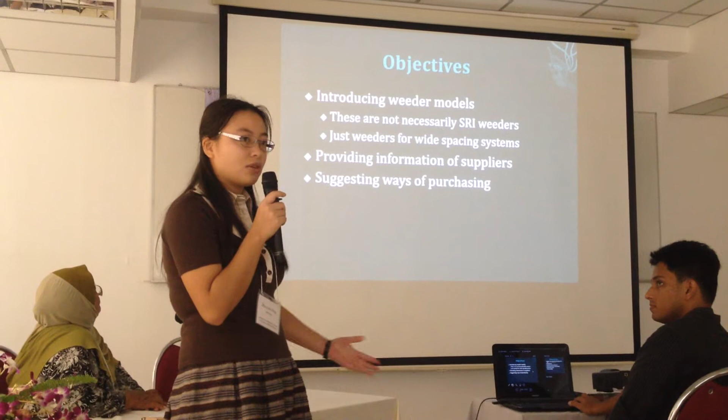The objective is to introduce different types of weeders and see if they are available for other parts of the world to get. I also have information on all these companies and websites where you can look for these weeders.

First is China. I found some research articles and patents about different kinds of weeders, but unfortunately I was not able to find them online. It seems they are only manufactured in small factories, only available to local people. But I still figured out how to find 2 big companies manufacturing and possibly selling them.

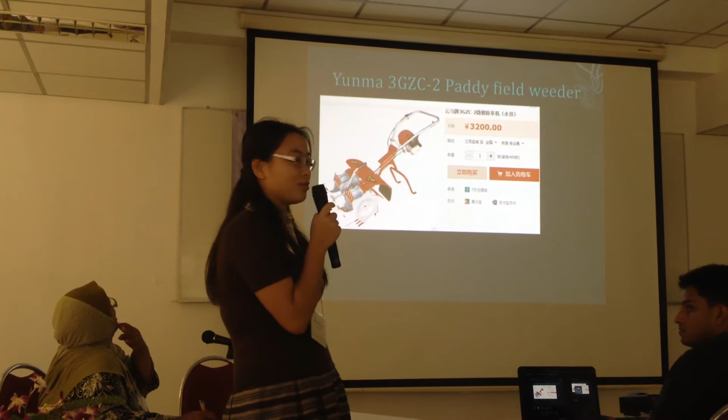The first is this one - a kind of big company that does a lot of international trading, and they make a motorized 2-row weeder. This is how it looks, and it looks pretty similar to what we saw yesterday. This is the price on the Chinese online shop, and it will be about $540 I think.

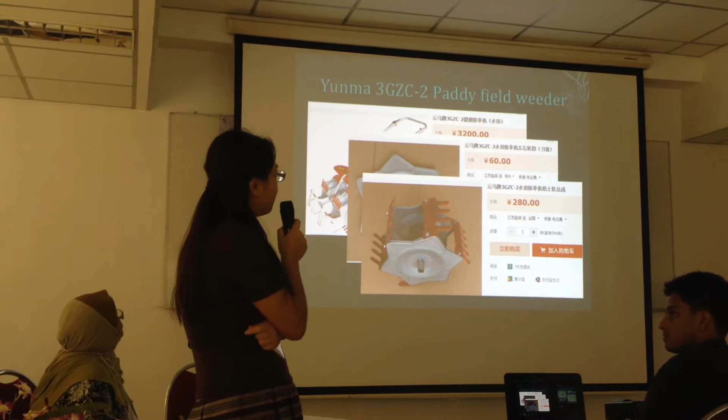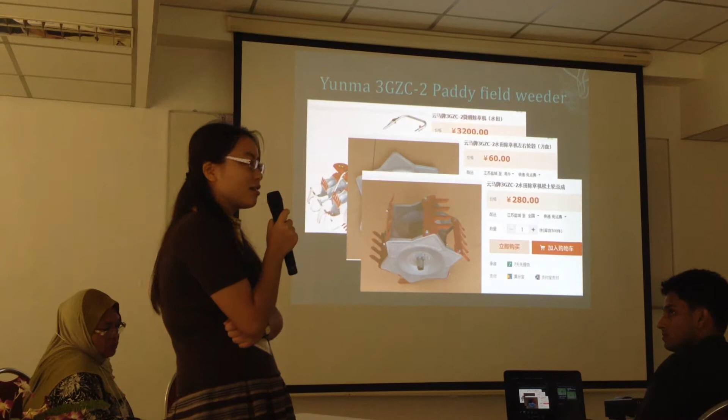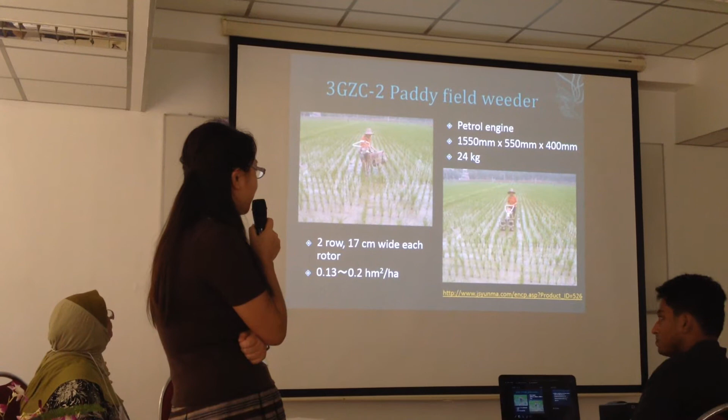The parts are also available - this one may be $10 and this one will be $40 to $50. I find these parts are only available on their Chinese online shop, but I think if you request when you contact them, they should be available. This is how they work, and each row is 17 centimeters wide, so I think it should be able to be used in SRI fields.

These are also traders that can provide this weeder, and depending on how many units you order, the price can vary - it'll be like $500 to $700.

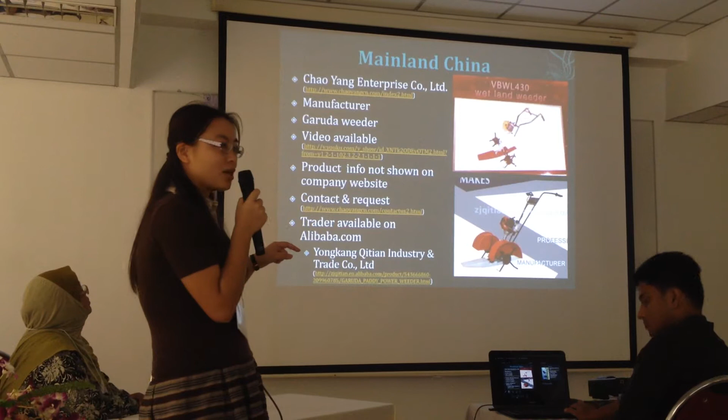Then I found another company on Alibaba providing this weeder, and they look pretty similar to me. This one they didn't provide the price because they say it can vary a lot depending on which area you're going to ship to. I have the website here, so you might want to contact them directly.

Then moving on to Taiwan. A lot of Taiwan companies have no experience in international sales - they only sell to farmers inside Taiwan. I contacted this company and they say they can try to sell to other parts of the world, but I might have to find a trader for you if you're not ordering in large amounts. This is also a motorized multi-row.

This is another company, and it didn't have a phone number or website, but they had a Facebook page. This company mostly imports Japanese weeders to Taiwan and does a little bit of modification.

Then Japan - we know a lot of good designs were made in Japan, but it's really difficult to get them because they only sell to Japanese farmers, they don't do any international sale. So I find 2 websites that provide service to people outside of Japan - they're like international shopping sites. But for big products like weeders, they don't ship outside of Japan.

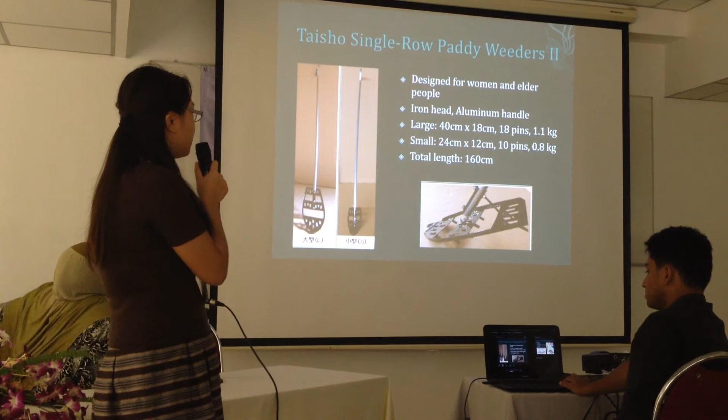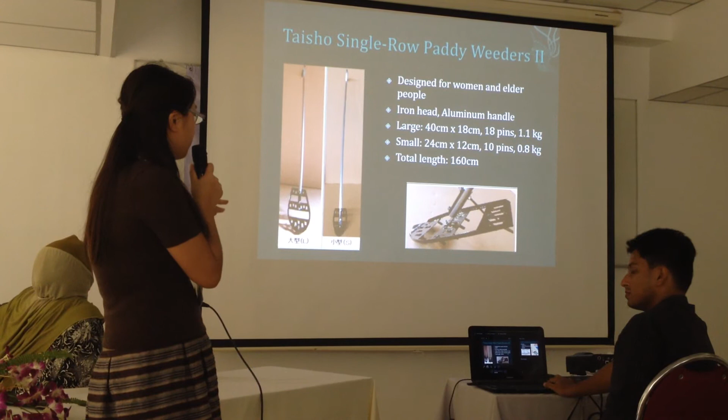And this is another weeder made by the same company. They say this is designed for women and elder people. It's really light, only about 1 kilo, and it has a lot of pins. It doesn't really have a rotor, so I think it's just brushing the field surface to get rid of the weeds.

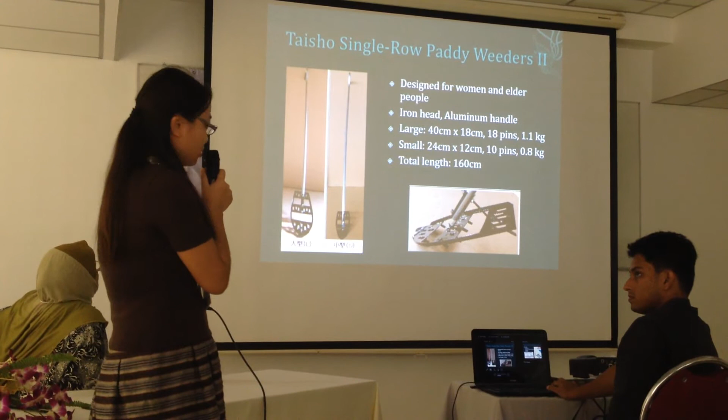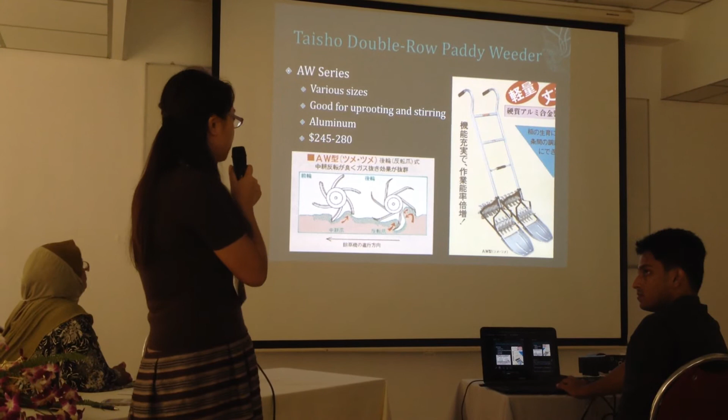And this is the 2-row version, basically the same design. As you can see, the arrow points to the direction you push the weeder, so the back rotor has a good effect of uprooting.

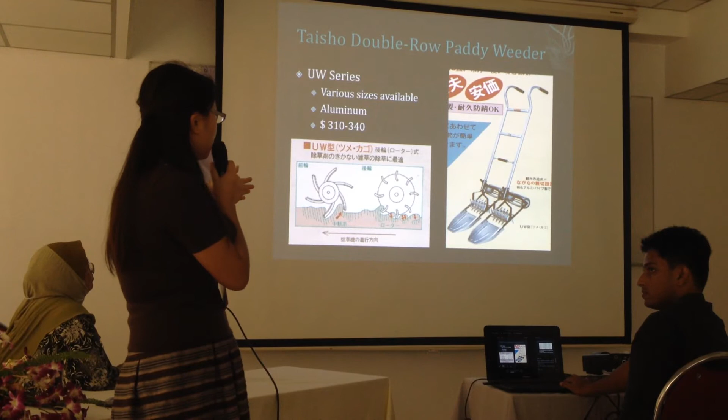And this is another type. The back is kind of like a drum, and this is for fields that have a lower weed pressure.

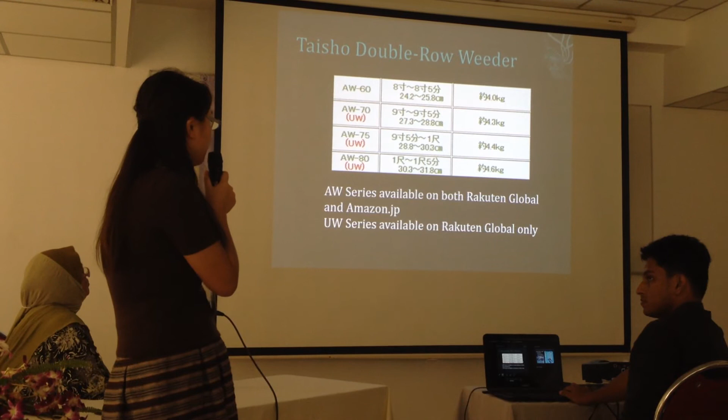And this also has various sizes and is not really heavy. I have put out all the links in the notes of the slide, so I will be willing to share these slides with you later.

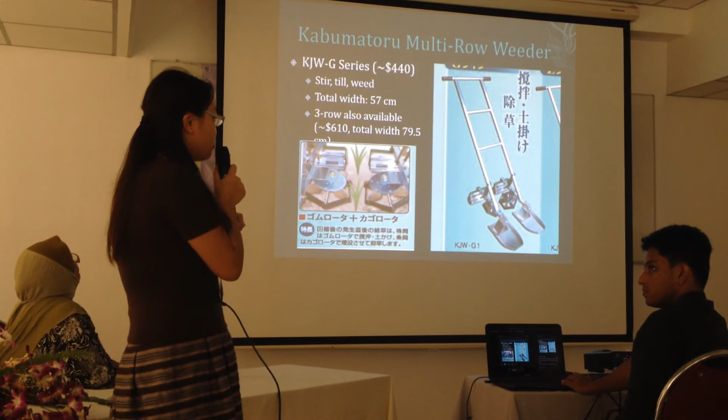And this is another type of 2-row manual weeder. This has the ability of weeding interplant, so you can see the horizontal rotor, and this is made with rubber. This is believed to stir and scrape weeds.

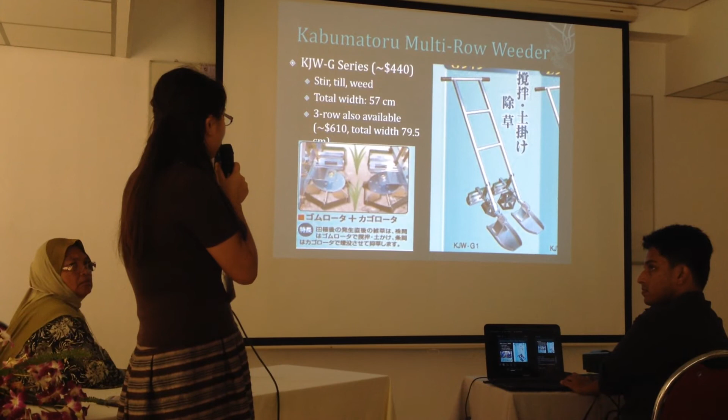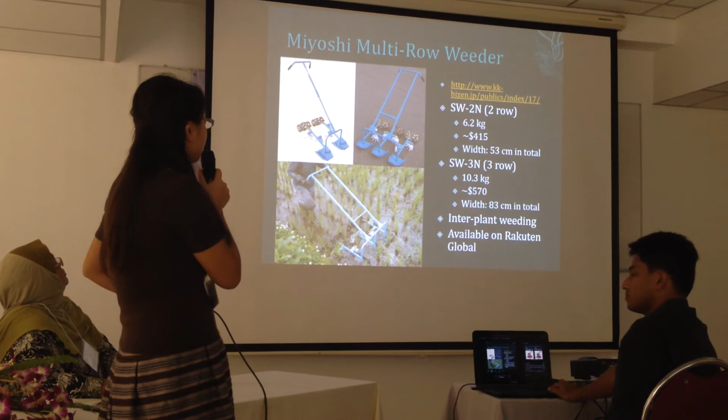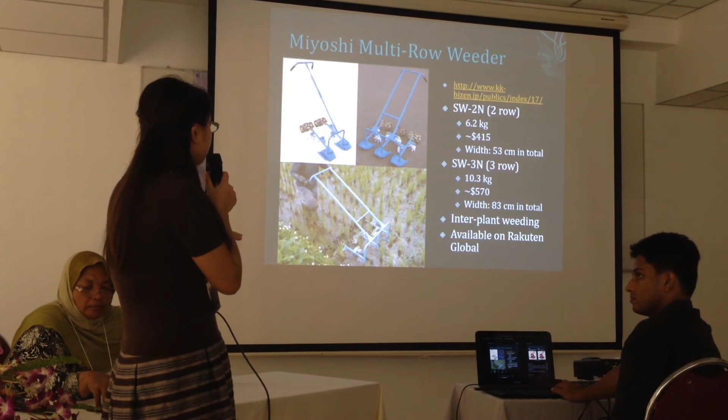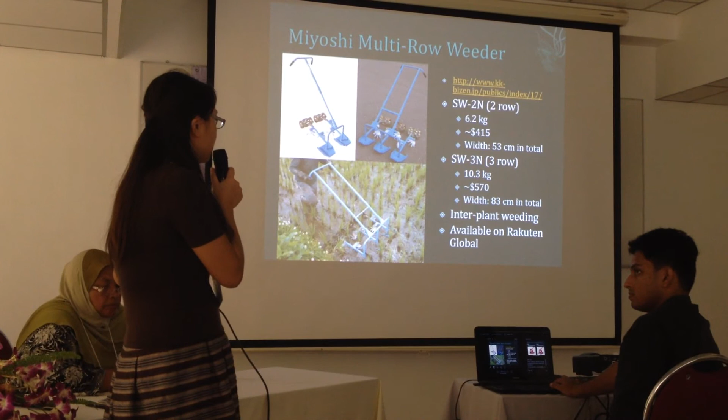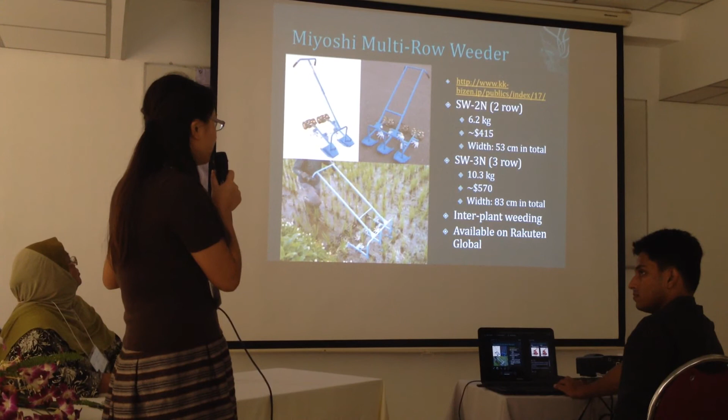And this is another one that has the function of weeding interplant, and it has a drum at the back, and then the horizontal rotor in the middle, and it has both 2-row and 3-row versions. On the website, it didn't say exactly how wide it is for each row, it just gave the total width—for example, the 2-row width is 53 centimeters. So I guess for each row it might be 25 centimeters.

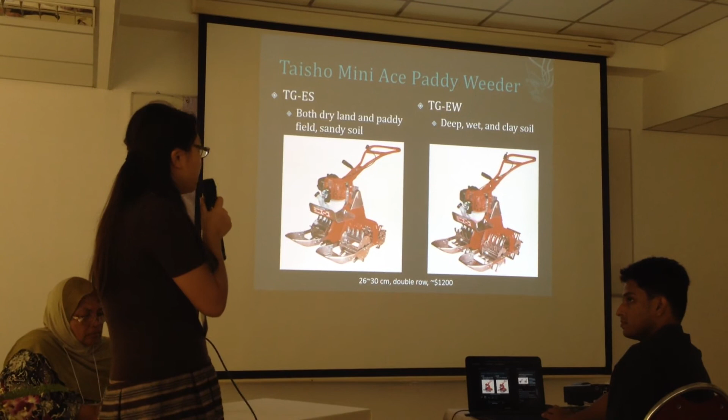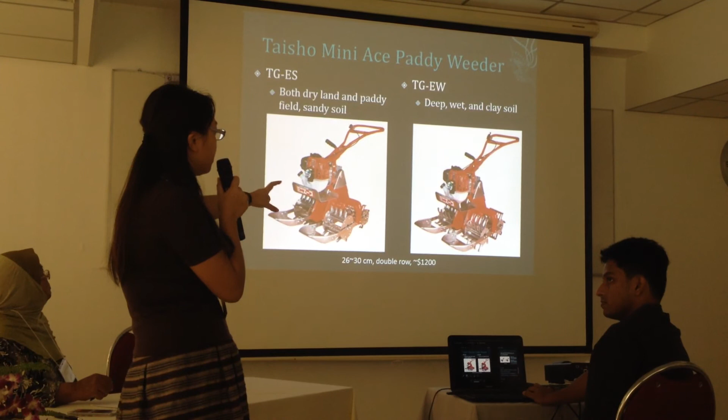And then this is the motorized weeder, and they have 2 different types. The first one is mainly for sandy soil and dry land, but you can also use it for paddy. The second one is specially designed for clay and paddy soil, because you can see the front has a longer spike and is a little bit more curved.

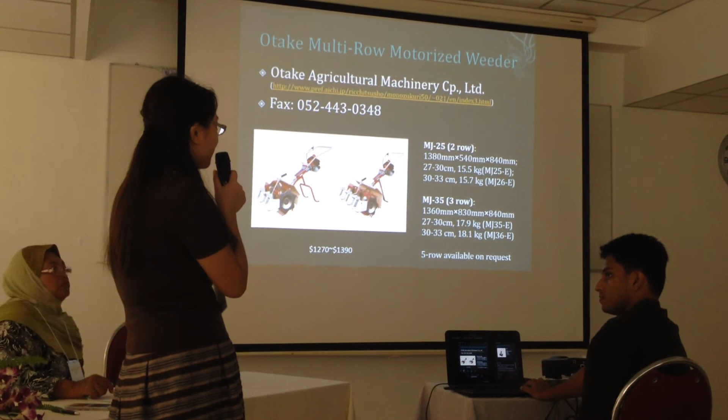And then this type looks the same as we saw earlier on the Chinese website. I don't know, maybe this is the original one. This has 2-row and 3-row versions, and if we request, they can add 2 to the side to make it a 5-row, but that will be 4 kilograms heavier, I think. Okay, so this is another one, we can just go through it.

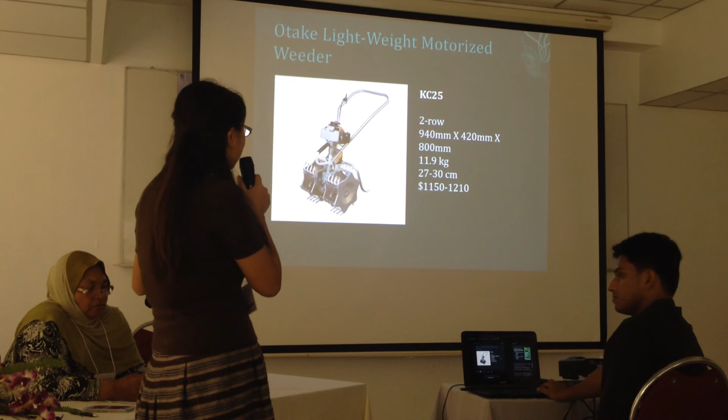This is another company making this type, but this does not have a 5-row type. And then this is...

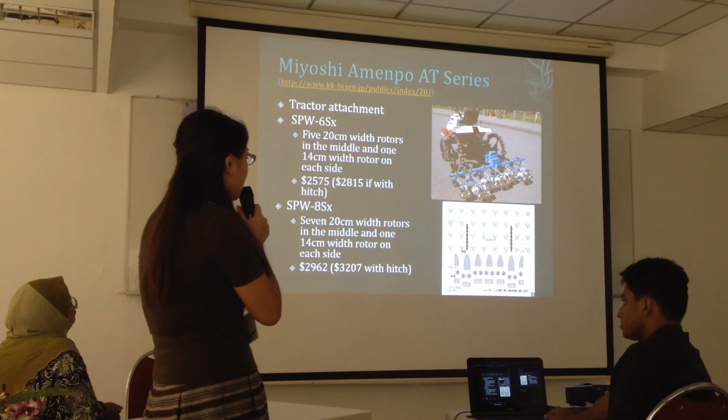And this is a smaller version of that one, which is a little bit cheaper. This one attaches to a tractor or other riding part. As you can see from this picture, this is how it works, with different sets of parts, and we can just move on.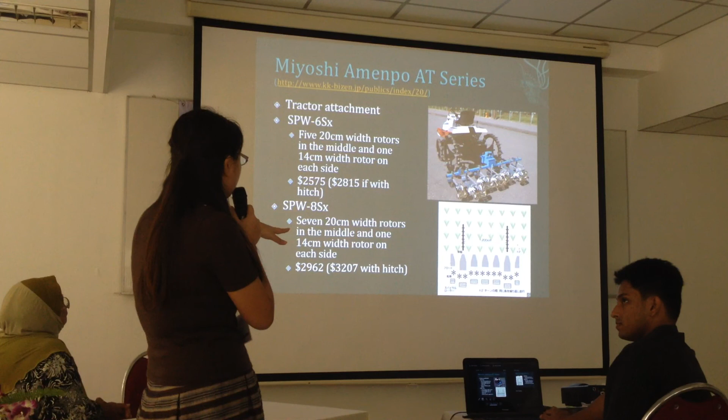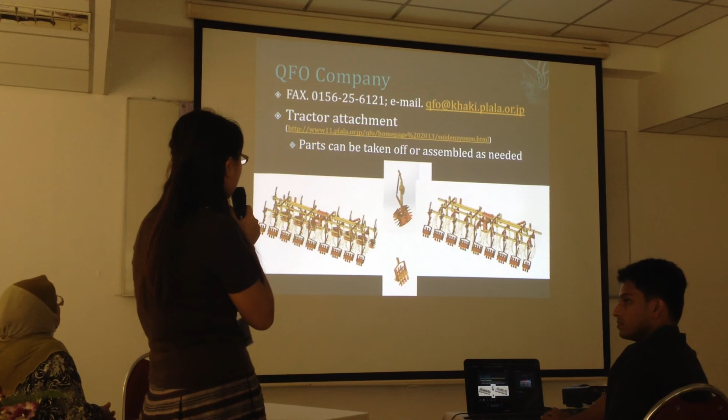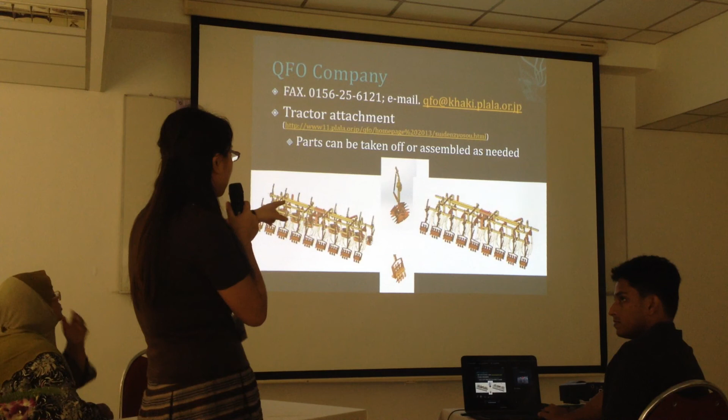So this is a smaller version of that, and this is another one attached to a tractor. I didn't find the price on the website, and you can take off the parts or put them together. As you can see in the middle, there seem to be plastic strips doing interplant weeding.